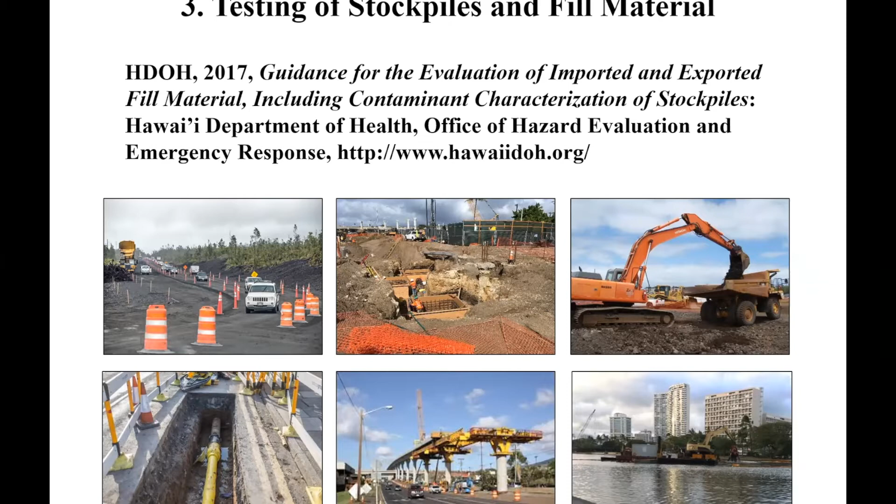We're not going to go into a lot of detail on how this is done, just to let you know that information is out there.

So the collection of soil samples and sediment samples is actually fairly simple. The first step is you designate what we call a decision unit, an area and volume of soil or sediment for testing. So think of a stockpile or some area, and that's the volume of soil you want to test. You want to get a single sample from that soil. There's specific limits on the area and volume of soil that can be included.

And you'll collect a sample from 30 to 75 points within that volume of soil. Each point we refer to as an increment. You combine all these increments of soil together to prepare a single multi-increment sample. It's going to be a half gallon to a gallon in size.

Then you send that to the laboratory, and they're going to process it, sieve it, air dry it, very carefully, and then test it for the target contaminants of concern. You compare that to our environmental action levels. Sometimes for any project we'll go out and test one area 3 different times just to make sure we're getting it right and we get the same answer each time.

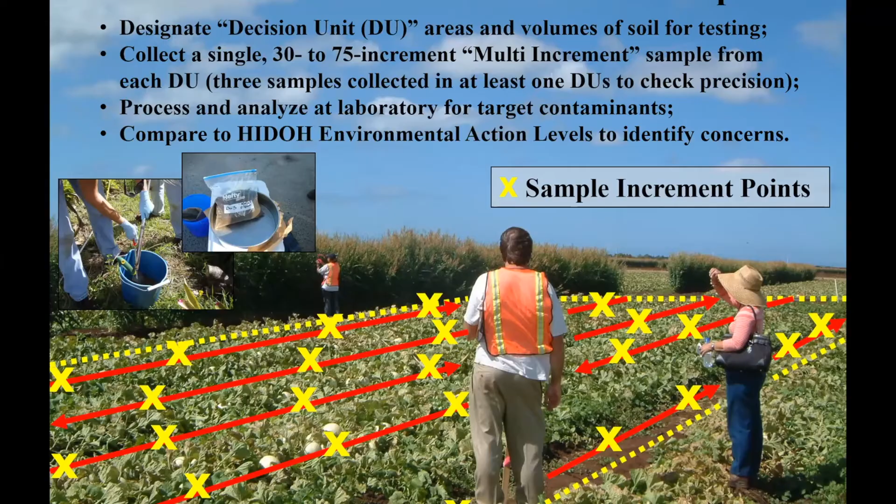So we have special sections specific to stockpiles, because they can be huge problems. The best way to test a stockpile or soil that you're excavating is to test it as you're moving it. So the environmental consultant could grab a sample from each truck as it goes by, or as the soil is being dumped into a stockpile, they grab a few increments, a few handfuls of soil, to prepare a larger sample for it. We have very specific guidance on what volume of soil can be included in any single sample.

It depends on where the soil is from and how it's going to be reused. So if you want unrestricted reuse of the stockpile of soil, you'll be limited to collecting 1 sample per 100 cubic yards as a start. That's because somebody's residential yard might have 6 inches of fill material in it, so we want to be sure the contaminant levels are low enough that they wouldn't pose a potential concern to children and such. For dredging projects, we can test 800 cubic yards or even several thousand cubic yards if we don't suspect the soils or sediments are contaminated to begin with.

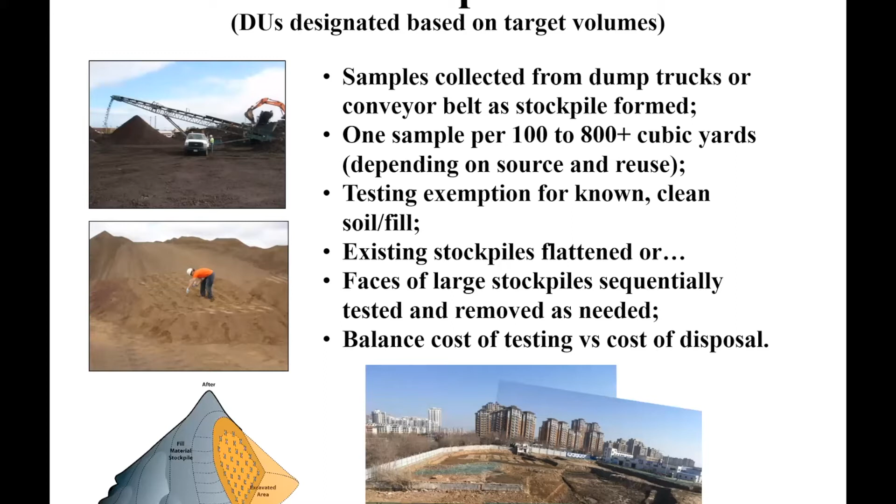We have specific guidance on that and how to spread the stockpiles out for sampling, or how to cut faces off of large stockpiles and progressively sample them as the soil needs to be reused. A lot of this has to do with balancing cost of testing versus cost of disposal. And as I'm sure everyone's aware now, we're running out of places to dispose of soil. So it's really important we be able to test it efficiently and cost effectively for reusing it.

So we have a lot of detailed guidance on how to collect soil samples, and it may seem kind of simple, but it's actually a very specific protocol you have to follow when you're collecting samples from soil. One thing you want to make sure is if somebody goes back and tests the same soil, they get pretty much the same answer you did.

That's what's causing a lot of problems, especially on the mainland now, where people have tested soil at properties and thought it was clean, but they didn't collect the samples properly. And now bankers and lawyers are requiring them to go back and retest the soil, and they're finding contamination and such. So how you collect a sample is very important.

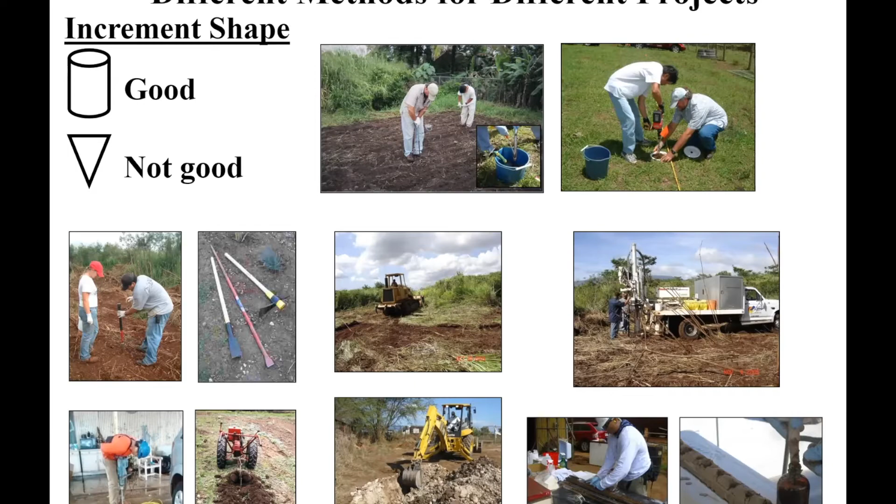And we have a 6-part training series posted to our YouTube channel on how to set up investigations, how to collect samples, how to process them at the lab, and then how to determine if you have a problem or not. That's on collecting samples.

Once you've collected the samples, the first thing we do when we get a report from you is, instead of just looking at your conclusions, we look at how the samples were collected to make sure you followed our guidance and did it properly. And assuming all that went okay, the next thing we would do is determine if there's a potential problem with any contaminants identified in the soil.

And you'd identify what contaminants to test for based on how the property was used in the past. And we tend to focus on contaminants that are toxic and persistent, like lead or PCBs or arsenic, other types of chemicals. We also deal, of course, with a lot of petroleum contamination. We'll talk about that in a minute. But we have very specific environmental concerns for contaminated soil and contaminated groundwater that we try to look for at every site if it's applicable.

For contaminated soil, the first thing we think of is kids playing in the soil. So we refer to that as direct exposure, even adults being exposed to contaminated soil every day, or construction workers. If we're worried in some cases about ecotoxicity to flora and fauna, that's a separate topic we would look for. It's not very common in projects in urban areas. A big issue in Hawaii is leaching of contaminants from soil and contamination of underlying groundwater, especially since we're totally relying on groundwater for drinking water.

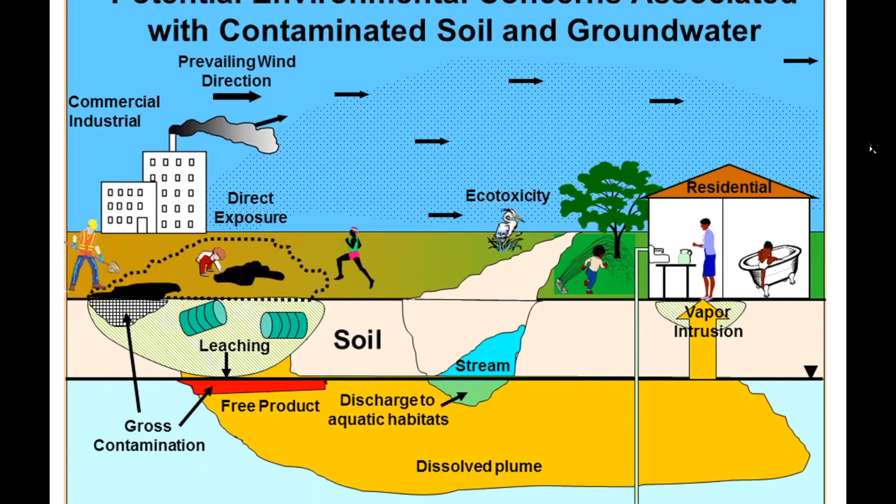So for each one of these concerns, we compile environmental action levels, the concentration of a contaminant in soil. Above that concentration, it could pose that specific problem. So we refer to a lot of guidance published by the US EPA. We modify that for use in Hawaii, especially for human health risk concerns.

For ecotoxicity concerns, if it's discharges to aquatic habitat, surface water, we have promulgated standards for contaminants in surface water that could pose problems for aquatic organisms. If we're concerned about terrestrial habitats, then that's really a site-specific ecological risk assessment. You have to get a specialist to come in. It's very rare. Leaching of contaminants to groundwater, we look at guidance published by Massachusetts, which works fairly well in Hawaii.

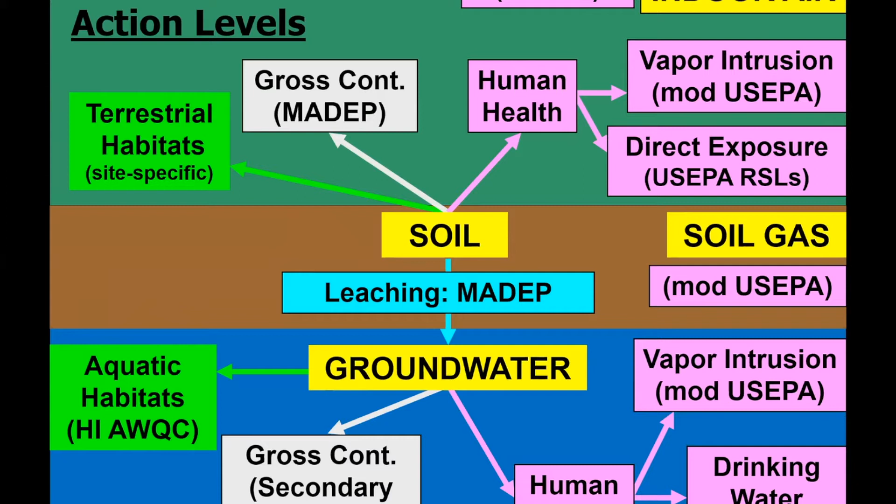And the big thing is gross contamination. Again, guidance published by Massachusetts quite a while back. And this especially tells us when we could have problems with odors and short-term vapors and heavy contamination in the soil. I like to focus on contamination.

This is my last consulting project before I start working as a regulator in California EPA. This site was a former gas station. It had been declared no further action was necessary, essentially been declared clean by the state. At the time, I was a consultant, and they had dug up the gas station, been shut for 20 years, and they dug out most of the contaminated soil. They were putting in an underground parking garage for a big office complex. I can't tell you where the site is, some large state on the West Coast, you can probably guess.

Well, I was actually in my office reading the report for the site, and the consultant was out there, and the report I was reading said everything's fine at the site. And my coworker calls up and says the site's on fire. So how can that be? This is in the 90s. We were totally missing this high concern of what we call now gross contamination.

But the gasoline vapors in the soil were so high that when they dragged the backhoe through it, the soil would catch on fire. It'd set off sparks. They had to get a remote control backhoe out there, and you can see these poor consultants out there in their Tyveks with fire extinguishers. Not a job I'd want to have.

So something that interferes with most construction projects is when you dig into petroleum contamination that you weren't anticipating. And you'll get high short-term vapor emissions that could cause a lot of problems with your neighbors. In some cases, I haven't really seen this in Hawaii, you could get explosive vapors. Mobile free product, all this stuff that mucks up your equipment. And then you have all this soil and groundwater you suddenly have to deal with.

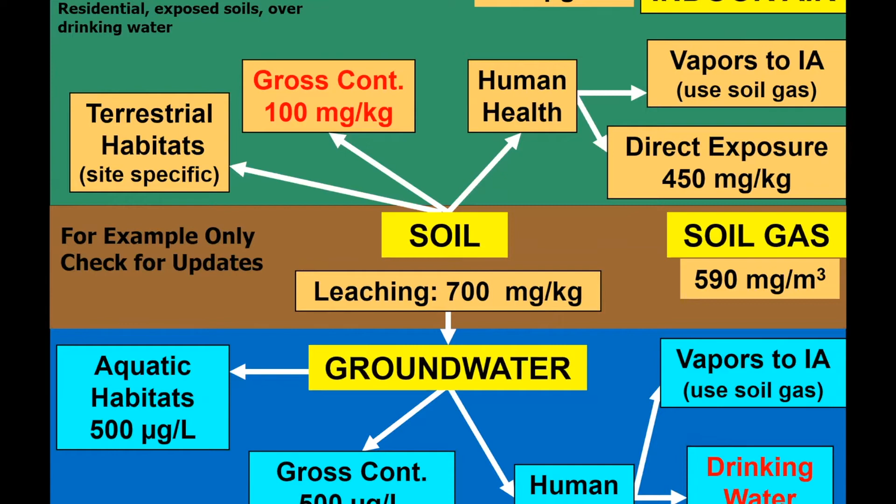And then if this gets into your aquatic habitat, about the same concentration, above 500 micrograms per liter, which is 3 or 4 drops in a 50-gallon drum, then it could start posing problems to fish and other aquatic organisms. So those are action levels. We have about 150 different contaminants listed.

And our guidance tends to cover most of the common pesticides, heavy metals, petroleum, solvents, explosives that we see here in Hawaii. And there's a lot of details on how each one of those action levels were derived. This is all put together in a pretty easy to use Excel-based tool called an EAL surfer, electronic lookup tables, where you select your site scenario.

Is it residential or unrestricted land use, or commercial, industrial? What's the groundwater use? Then you can select the chemical by the name or the CAS number, input site data, and it'll automatically tell you if you have a potential problem at the site and what that specific problem is. And then it'll generate a very short summary of the origin of the action levels and potential concerns.

So this really helps you incorporate all this expertise very quickly up front in a project to help the environmental consultants to get in and take care of their issues and get out of the way of the construction project. If your concentrations are below these action levels, you don't have any problems. If they're above, it doesn't mean you specifically have a problem, it just means you need to look at it in more detail.

And a lot of times it's just not possible to completely clean up sites, especially when you're dealing with widespread petroleum contamination or some of the contaminated fill material here in Hawaii. In that case, you have to map out where the contamination is, what the potential problem is, and then prepare some type of long-term environmental hazard management plan that describes how to manage the contaminated soil and groundwater over time during construction projects and in the future.

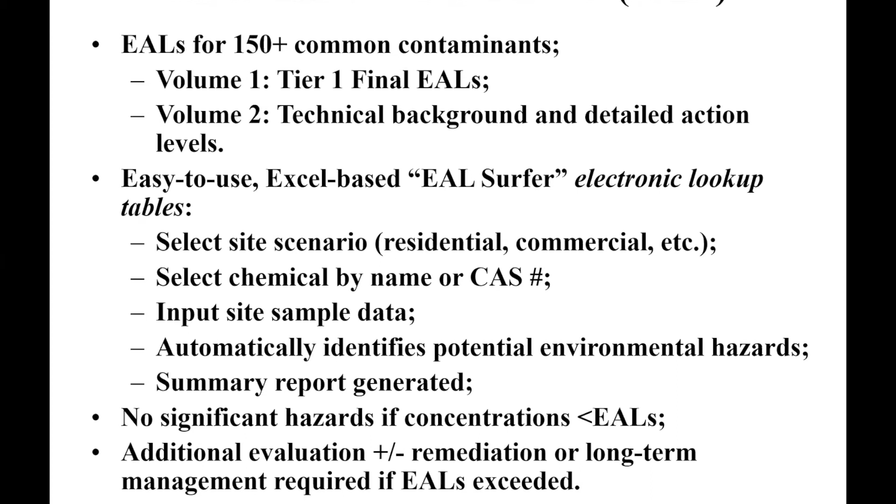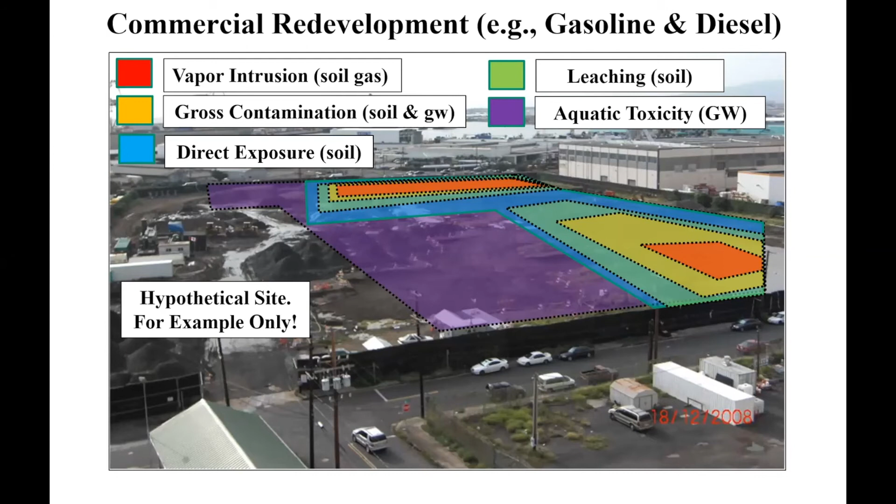So ideally, the construction folks would get a map like this for any project and work with the environmental consultants. They need to determine what to do at the site. We can't clean it all up most of the time. So in this last slide, in my example, it's actually pretty close to what they did at Lowe's. You take out the really heavy contamination, the stuff that's going to cause vapors to come into your new Lowe's store. You don't want that to happen.

This contamination, try to take out as much of that as possible so that when people go in and do work in the future, or even during redevelopment to prep a site for construction, you get out all the gross contamination so that you don't have to worry about vapors coming out and your equipment. And then the rest of it, you have to manage in place. So you know where your contaminated groundwater is, your utilities there below the groundwater table. You have to do dewatering. You know you have to do something with that groundwater, either store it and put it back or treat it. These are all part of long-term management plans or construction management plans.

In the case of Lowe's, if you ever go there, walking around, especially on the home garden side of the building, look up at the roof. You'll see these little fans, little whirlybirds. And at Lowe's, what they did, they removed contamination, but there was still a chance that methane might build up under the slab of the building and under the parking lot over time, just from the petroleum degrading. So they put in a vapor barrier under the slab of the building, like a membrane.

And under that barrier, they put in a venting system and ran it up to the roof that just allows air to flow under the slab of the building and continually pull the methane out. One of these engineer controls you incorporate into your construction projects. But again, you want to do it up front, include it in the budget. You don't want this to come in at the last minute and you suddenly tell your design people, well, by the way, you need to jack the building up 6 inches, put a vapor barrier under

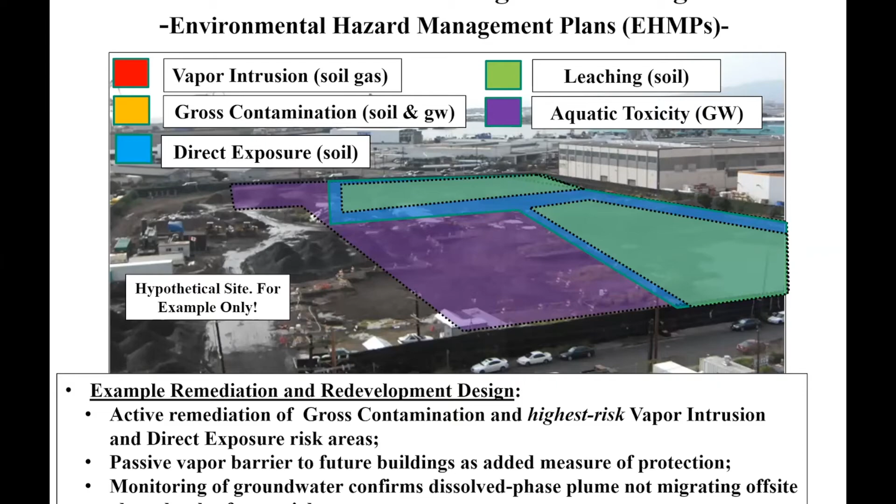it. That's just a quick idea of how samples are collected in the field and kind of the role of the environmental consultant and all the expertise that's required just to do a job properly so you can get in and get out without delaying projects. And also we talked about how to evaluate potential environmental hazards.

In the 90s, when we were doing this, we had to look at every chemical site by site, every sample case by case. On average, it took 1.5 years after they collected the data to determine if there was a problem or not. And that's when we started publishing these environmental action levels with EPA. Now we can do it in, I like to say, 30 seconds instead of 1.5 years. It's a very critical part of the project.

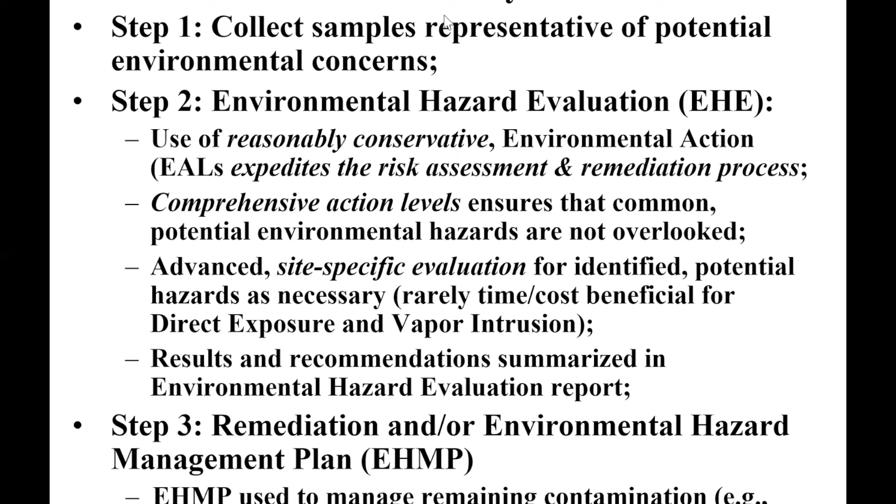And then in step 3, once you've identified the problems, always get the developers and construction people involved from the start. Include this in their project plans so that projects can go smoothly. So that's it for my side of the presentation. It's kind of a background, the guidance and such we have, and the basics of what's going on in the field. So next, I'm going to switch over to my coworker, Sven Lindstrom, and he'll give you some more details on actually working on specific projects.

Observations made during pre-construction geotechnical borings can also identify potential contaminants, as can a call to our office to discuss your project in advance with one of our staff. We'll be happy to work with you. We'll likely recommend that you do a phase 1 if you haven't done one already, to collect some basic background information on the property. And finally, you can collect samples in the areas where excavation will occur to determine whether contaminants of potential concern are present.

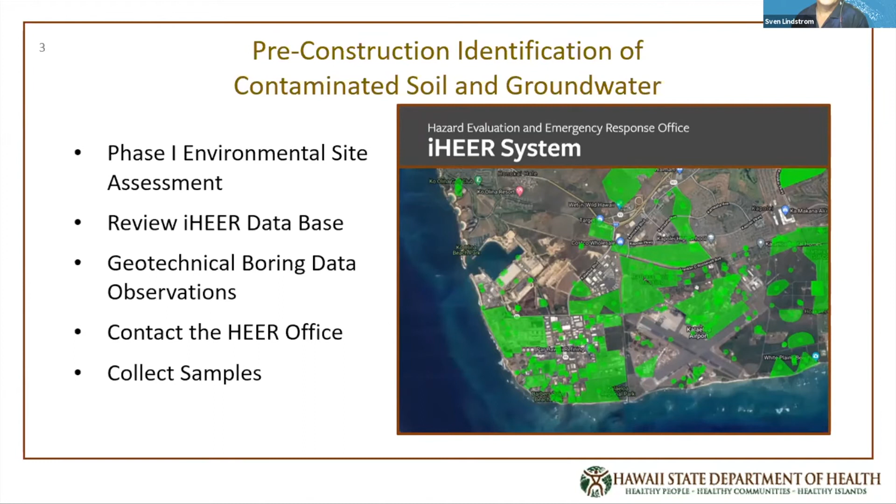The phase 1 environmental site assessment should be conducted following the ASTM standard 1527. It should include a review of regulatory records in state, federal, and local databases, as well as a review of historical records, historical maps, and aerial photographs if they're available. In addition, it should include interviews with current and past property owners and with owners and users of neighboring properties.

The purpose of the phase 1 ESA is to identify what are called recognized environmental conditions, or RECs. RECs are indications that there may be contamination on the property or on adjacent properties which could impact your site.

For example, if the site was formerly a gas station or a dry cleaner, there may have been historic releases that occurred that impacted the site, or historic records may show that there was a leaking underground storage tank on a neighboring property with the potential to impact the site.

RECs are not confirmation that contamination is present, but they should give you pause to consider whether environmental hazards may be present. They can also help identify where on a property those hazards may be. If RECs are identified on a property, it's prudent to conduct further investigation prior to redevelopment.

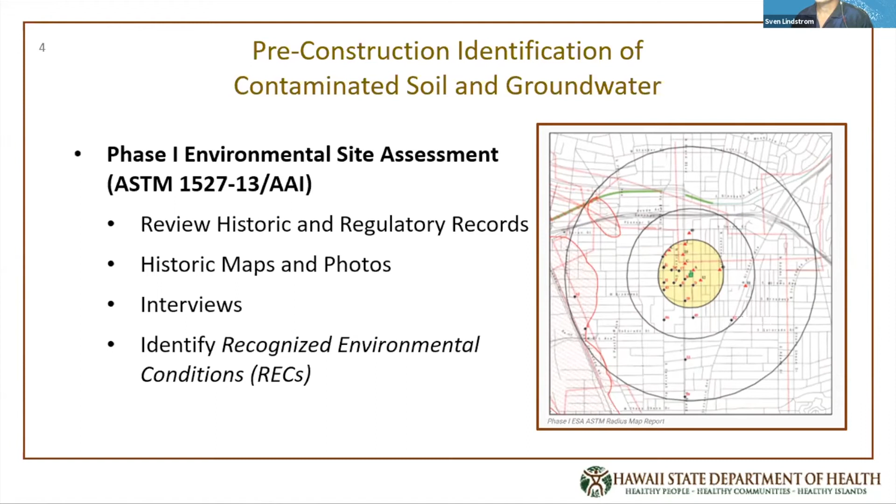Another place to look is the HEER Office's online database, iHEER. With iHEER, you can use the viewer to scan a Google Earth-like map or type in your property's address to zoom to it and check to see if your property or nearby properties are in our database.

Each site in our database is displayed on the map with either a site centroid or a site boundary. And by clicking on the site or typing the name of the site into the search box, you can access all the regulatory records in our database for review. Some of the sites may have already been cleaned up or may not have conditions that will impact your project, so you will have to review the records to determine that.

In the future, we're planning to add other features to iHEER, such as the site status, which will let you know whether cleanup is completed or not, site priority ranking, what types of contaminants are present, what institutional and engineering controls may be present. But for now, iHEER is still a work in progress, which basically just provides you the documents. So you have to go in and do the hard work of reviewing it yourself. But slowly but surely, we're going to get there.

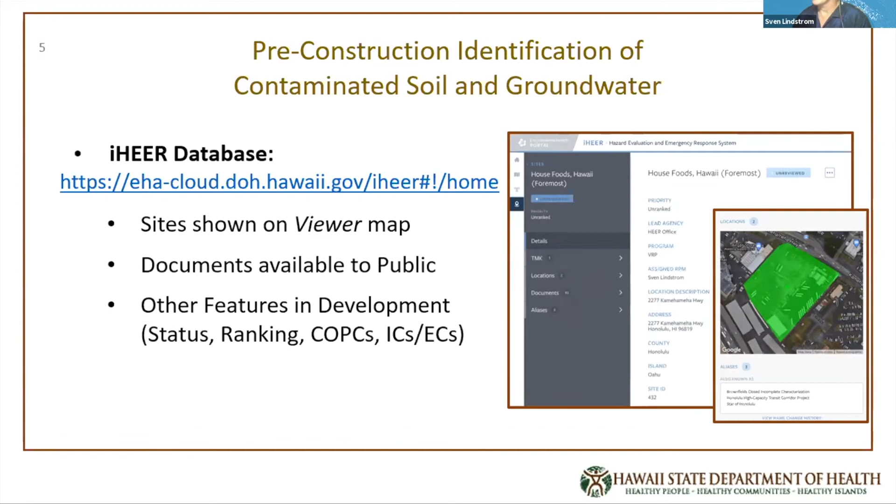So, unfortunately, historic and regulatory records are not always complete. So even if you do your due diligence, there may be unexpected contamination at your site. There's a few more steps that you can take to help ensure that you identify any environmental hazards that may be present before construction starts.

Occasionally, when collecting pre-construction geotechnical borings, the drillers will note smells or staining in the soil, or even free product floating on the groundwater. Developers should review the boring logs and talk to the drillers, because these discoveries could indicate that there is contamination at the site that needs to be addressed.

You can also call our office and talk to one of our remedial project managers to discuss the project. Our RPMs have a lot of knowledge about environmental conditions across the state, and we can help advise you whether a site investigation is warranted.

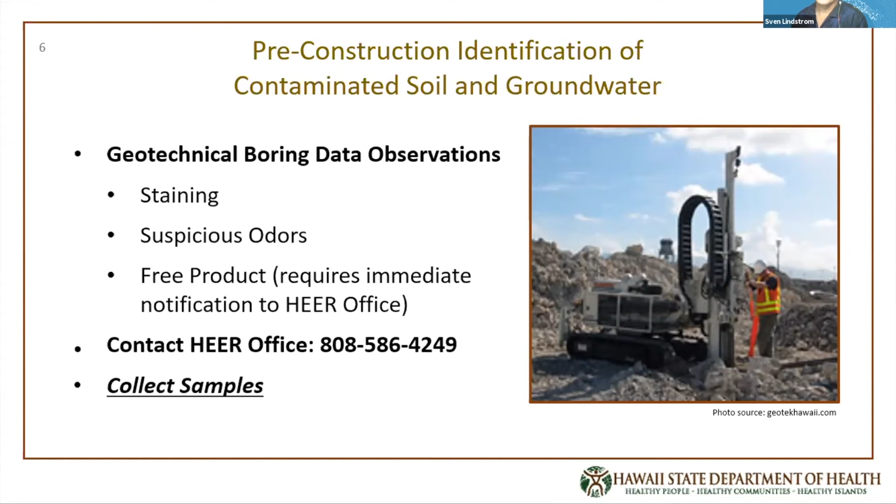For instance, areas like Kaka'ako and Iwilei that have been industrial areas for decades may have subsurface contamination, even if you don't identify a specific REC at your site. Former ag land can also have contamination in the old pesticide mixing areas that may impact your site. So if you're planning a project in one of these areas and you aren't sure how to proceed, you should give us a call. And finally, of course, there is sampling.

The first and most important step to sampling is to hire a qualified environmental consultant with experience in investigating the types of conditions that are at your site. We published a helpful fact sheet called How to Choose an Environmental Consultant that we recommend you review and follow in selecting your consultant for the project. There's a link here, and we also have that on our website.

Hiring the wrong consultant in an attempt to save money could end up costing much more money down the line if work has to be redone, and especially if construction has to be stopped in order for the work to be redone.

Your consultant should prepare a sampling and analysis plan that identifies the areas to be investigated and the contaminants of potential concern, and a plan for collecting samples that includes assigning decision units and multi-increment samples in accordance with our TGM guidance, which Roger just explained a bit. Simply drilling 3 boreholes and taking discrete samples of soil from each borehole to try to identify the presence or absence of contamination is rarely sufficient.

Analytical results should be screened against the most stringent Tier 1 environmental action levels for unrestricted, or residential, use. Even though your site may be a commercial or industrial site, if contaminant concentrations exceed unrestricted EALs, there will still have to be a plan to manage or remediate the impacted media, either before, during, or post-construction. We highly recommend that your consultant submit the sampling and analysis plan to the HEER office RPM so that we can review it before you begin sampling.

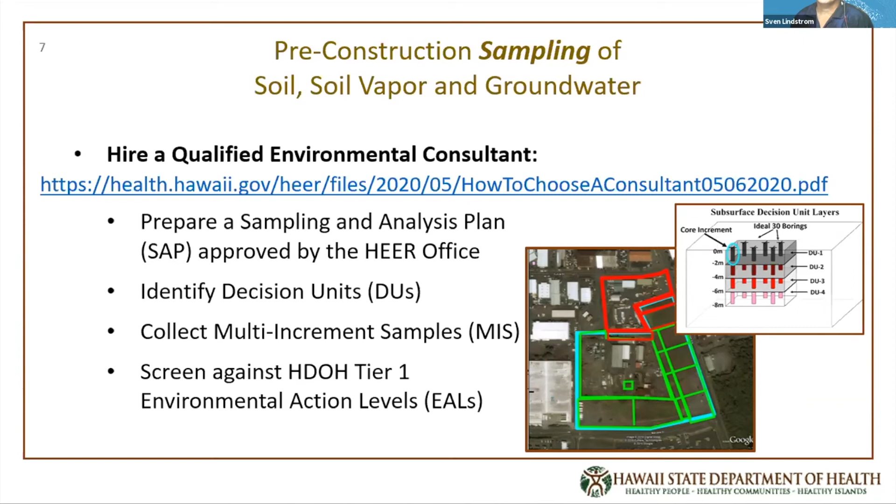Discoveries of contaminated media during construction is something you do not want to have happen to you. In most cases, construction will have to stop so that the hazard can be assessed, and the project plans may have to be revised to address the contamination somehow.

When contamination is discovered at your site, you must call our office immediately, and our on-scene coordinators will determine whether an emergency response is warranted. If it is an ongoing release from a damaged pipeline or something, they will help stop the release and contain it. Then, once the release is contained, or in the case of historic contamination that is not posing an immediate threat to human health and the environment, our OSCs will generally hand off the site to our SDAR section for follow-up oversight and management.

In order for us to determine how to proceed, we'll likely need to collect samples to characterize the nature and extent of the contamination. That is, we'll need to know what the contaminant is and how large an area is impacted.

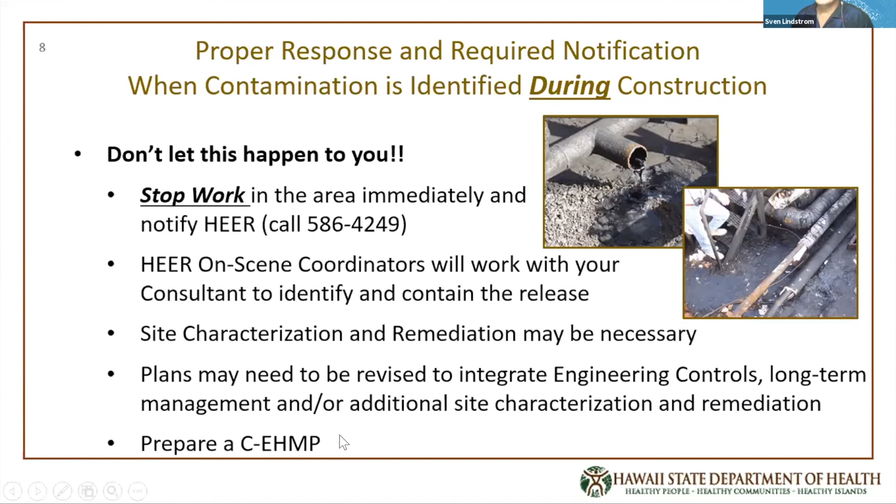Before construction can resume, at a minimum, a construction environmental hazard management plan, or CEHMP, will need to be prepared by your consultant. The CEHMP documents what is known about contaminants at the site and what sort of hazards they represent for site workers and the public, similar to the hazard map Roger showed you earlier. It also provides project-specific guidance about how the contaminated media must be managed during construction and how to properly dispose of any soil and groundwater that will not remain on site.

Fortunately, we recently completed preparation of a CEHMP template that your consultant can use to develop the CEHMP, which ensures that all necessary information will be included in the plan and puts it in a format that will be easy for the HEER office to review. The template is available at the website listed here, and you can also link to it from our homepage. Using the template to prepare a CEHMP is not required, but it is recommended.

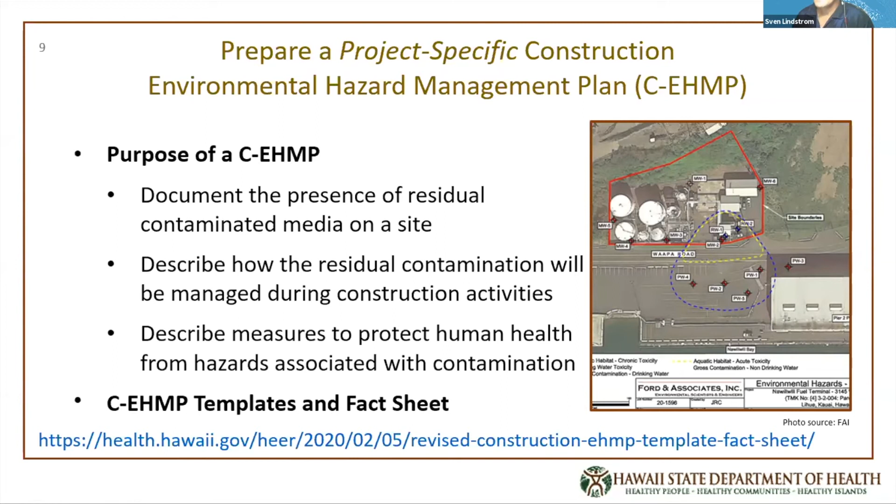We also have a few other types of EHMPs, as Roger mentioned. The site-specific EHMP is often prepared for a property that has had a remedial removal or response action where a portion of the contamination was left behind for one reason or another, like at that Lowe's site. The EHMP provides general instructions for managing the contamination in place, including any engineering and institutional controls that must be maintained, and it provides basic soil and groundwater management guidance for small-scale activities that may disturb impacted media, such as emergency repairs.

In fact, DOT is currently planning some storm drain work in this area that is within the plume area. However, since the plume is only in the groundwater in that area where DOT's work will be conducted, and the project won't be deep enough to encounter groundwater, there's no need for a CEHMP for their project. If the project did extend into a significant portion of the impacted groundwater plume, then preparation of a CEHMP would be appropriate for this DOT project.

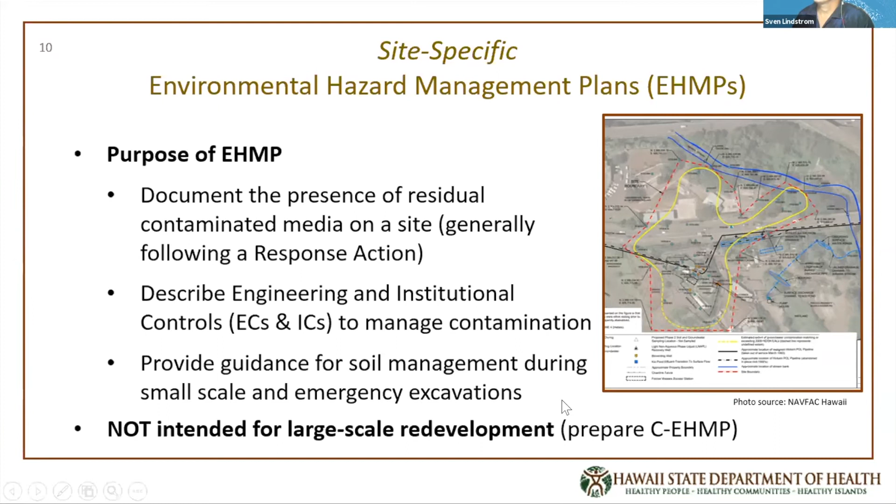AEHMPs, area-wide EHMPs, are also not designated for large-scale developments, so a CEHMP will need to be prepared. You can call our office if you're not sure whether a construction EHMP is required for your project.

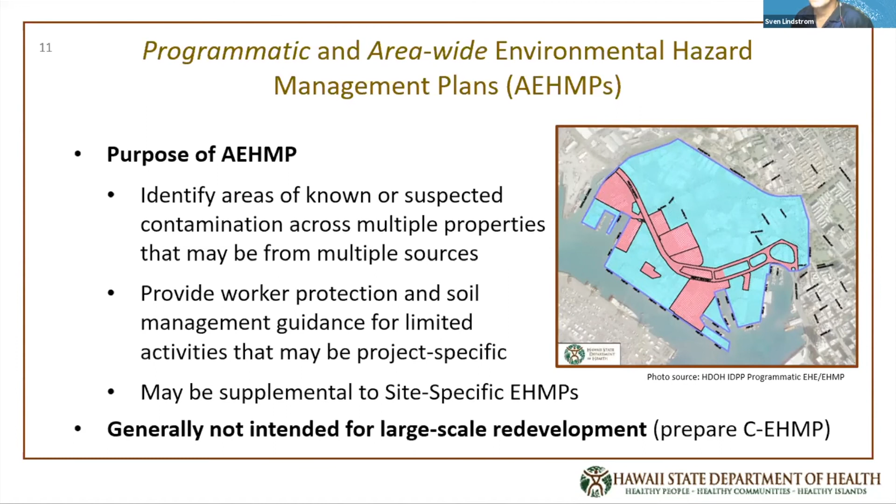The rail project also has a programmatic EHMP that covers the excavation activities at various parcels along the route, but only at the portions of the parcels where HART is doing construction.

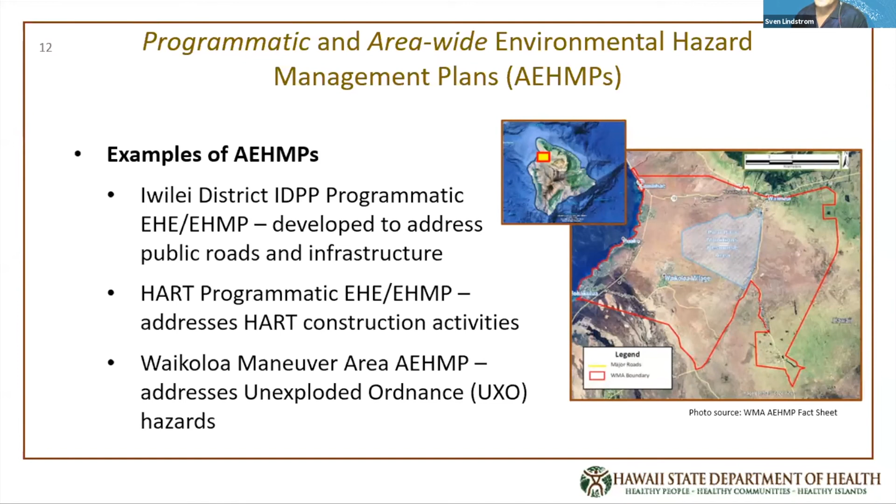Another example is the Waikoloa Maneuver Area, Area-Wide Environmental Hazard Management Plan. This covers over 100,000 acres in South Kohala on the Big Island. You can see a map of that on the figure here. This AEHMP specifically addresses the potential detonation hazard of unexploded ordnance from training conducted during World War II. Excavation activities anywhere in this area are covered by this area-wide EHMP, but specific parcels may also have additional environmental hazards that must be addressed.

One of the key elements of all EHMPs is proper management and disposal of soil and groundwater at the site. In most instances, soil can be reused at site, even if it is contaminated, as long as it's not grossly contaminated. However, it should still be replaced in the same area from where it was excavated, and it should not be placed in the groundwater or near the surface if it can be avoided.

Soil that will be exported to another site must be screened following our clean fill guidance and our TGM. If the contaminant concentration exceeds the unrestricted EAL, or if the sampling frequency is insufficient, then management will be required at the receiving site, and HEER will have to approve the transport.

Soil that goes to the landfill only needs to meet the landfill's requirement for sampling and characterization.

Groundwater may also be re-infiltrated on site as long as it is in the same general area as it was extracted from and away from streams or other surface water bodies. Any free product on the surface will first have to be skimmed and disposed of. A discharge permit will be required from the department's clean water branch to discharge into any sewers, either sanitary or stormwater. Another option for contaminated groundwater is to pump the wastewater into drums or other containers for either treatment or disposal offsite.

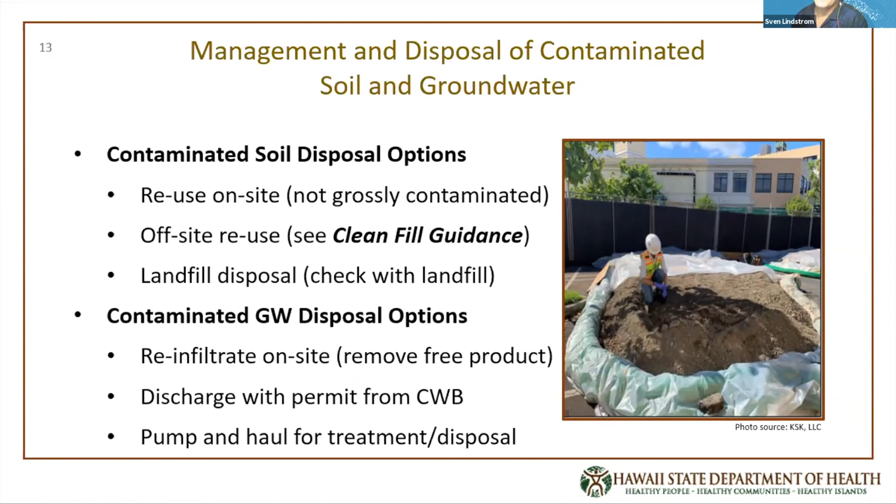As previously mentioned, releases must be reported to the HEER office. Failure to immediately report a release of a reportable quantity as defined in HAR 11-451 could result in a fine of up to $10,000 per day. Depending on what was released, there are other agencies that must also be contacted.

There's a link here at the top with information about reporting a release, which can also be found from our homepage. If it's a historical release and it's difficult to tell whether it's a reportable quantity, the best thing to do is to call it in to us. You can have your consultant do some further investigation to characterize the extent, and then call it in.

But in general, any exceedances of the unrestricted Tier 1 EAL should be reported to the HEER office so that at a minimum they can be added to our records. One easy example of a reportable quantity is free product. Any free product on groundwater or observable sheen on surface water must be called in immediately.

E-permitting is the system that we use for submitting documents. Again, there's a link here at the top. It's pretty simple to set up an account and password, and then you can submit plans, reports, or other documents. We prefer that you use e-permitting for all submittals to ensure that they get entered into our system. Occasionally, if reports are just emailed directly to RPMs, they don't manage to make it into the database, and that's what we're trying to avoid with submittals directly through e-permitting.